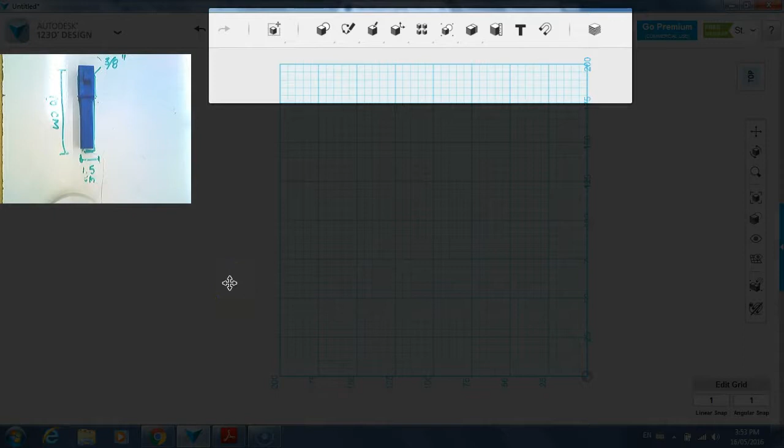Getting familiar with 123D Design, it's probably best to start across the top. These are our transform tools. They allow you to move objects around, stick them together, make them larger or smaller. There's two kinds of scale options—we're not going to go into all the details. You can measure things here.

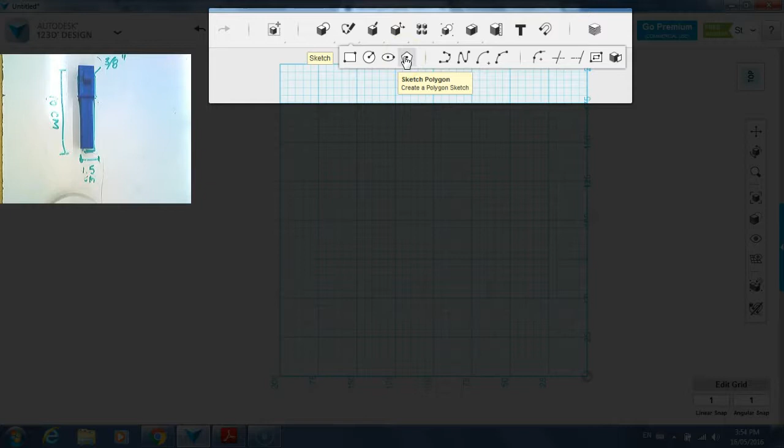Next set of tools are your primitives, these are your 3D shapes, so you're probably somewhat already familiar. These are your sketch tools, some of the tools we're going to be using today. So we can sketch rectangles, circles, ovals or ellipses, different kinds of polygons, pentagons, and then curved shapes as well, which we'll talk about.

Here we have constructing tools. Extrude is one we're going to look at today, as well as press pull. Extrude is contained in the construction menu, and press pull is contained in the modify menu—that one's going to be key for finishing our cube later. Other tools here are for patterns, grouping, combining and subtracting objects to and from each other, which is kind of neat, and our measurement tool.

Okay, so we're going to start with our sketch tool, and we're going to start to make our ratchet simply by grabbing a rectangle.

Notice over here, I'm in the top view, and the other thing we're going to do with view is make sure when you're starting out that you're actually in the orthographic top view. That just means I'm going to look at this object head on, as though doing a topographical drawing. If you change your view to side, left, or right, you'll be looking at those objects head on from that view, but we want to make sure we are in orthographic when doing our initial design here.

I'm going to zoom in a bit—it doesn't really matter, it's all relative. The idea that I'm zooming in is relative to the size of my shape.

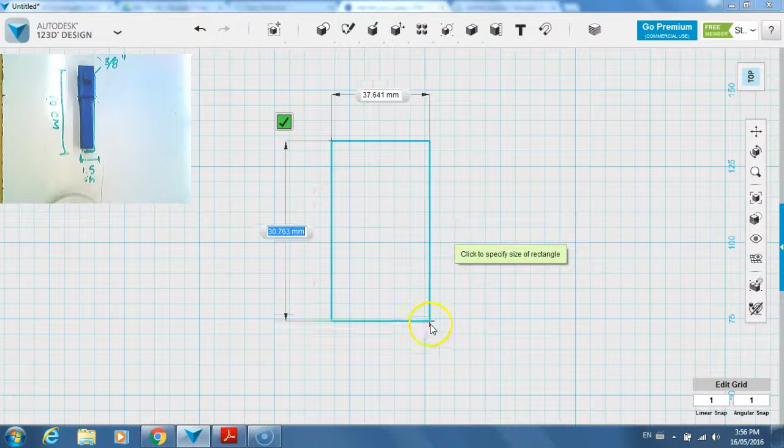But I'm going to click rectangle, and go down to the space where I want to start sketching. I'm going to click on the plane and just start dragging my mouse. I've not clicked yet, so I can still make this rectangle. This light blue line represents the rectangle I'm about to make, and you'll notice right now I'm in millimeters as my measurement.

I'm going to want that later, but for now I'm going to switch over—I'll just escape out of that. So I'm going to edit my grid, and you'll notice the default measurement units are in millimeters right now. I'm going to switch that to centimeters just to make this a little easier. So I'm just going to quickly do a little measurement here of my shape.

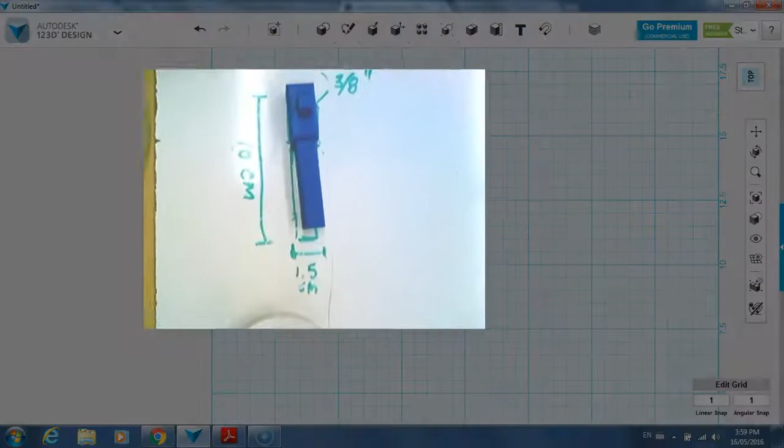So I've got most of my measurements. I know on the short end I'm 1.5 centimeters and my length is 10 centimeters. I want to see the larger shape here though, and it's coming in at about 2 centimeters. I'm just going to put it down over here, right around 2 centimeters, and just to make it simple, I'm going to shorten that and make it 2 centimeters, just to make the numbers nice and round.

I'm going to switch back here. I'm going to go into my rectangle tool, my sketching tool here, and I'm going to sketch a rectangle that is 2 centimeters wide.

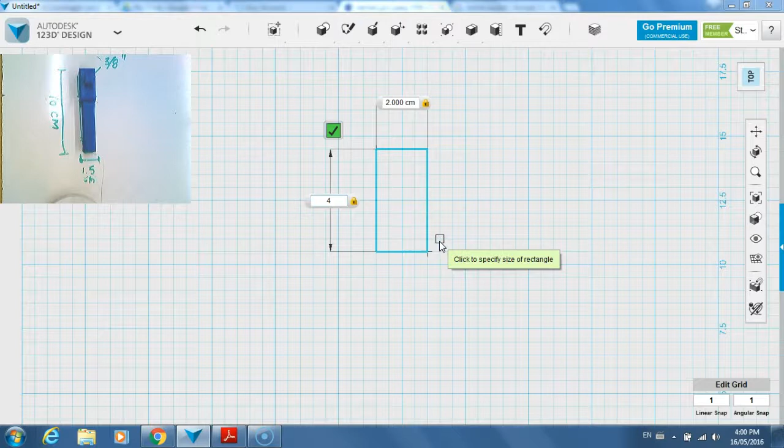Sorry, it's not 2 centimeters wide. I'm going to tab up to get to the other one. 2 centimeters wide. And my length of my first rectangle is going to be 4 centimeters. So I'm going to tab to get to the next button, and I'm going to hit 4. So now I have a 2 centimeter by 4 centimeter rectangle. And to make that shape live into the space, I'm going to hit the enter button once. Actually, I'm going to hit it twice.

Now I want to draw a second rectangle that's going to represent this part of the shape. I'm going to go over here and grab my second rectangle. And believe me, there's many ways you can do this, this is just one way. So rather than getting too hung up on this specific measurement, I'm just going to use a visual, non-traditional measurement here. I'm going to actually use the grid lines because I have a nicely aligned shape here. I'm going to use these 2 grid lines, here and here, to make my handle for my tool.

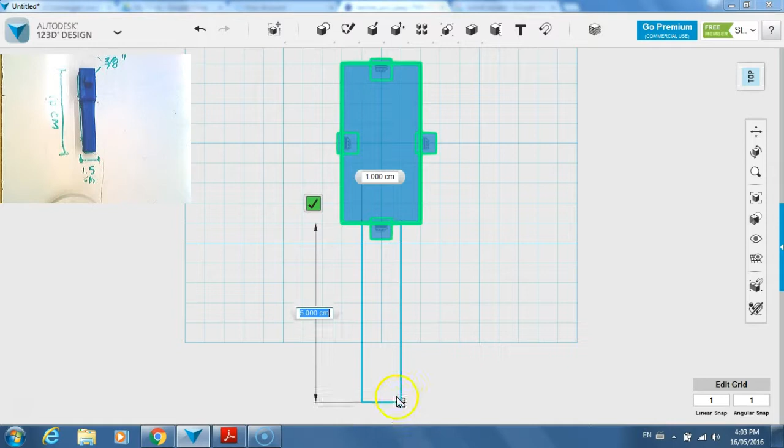So I'm going to go over to the sketch tool and select the shape that I want to add the handle to. I'm going to click once. Now it looks selected, you can see it's not as dark blue anymore. I'm going to click once and start dragging. I'm going to use these 2 lines to align my rectangle.

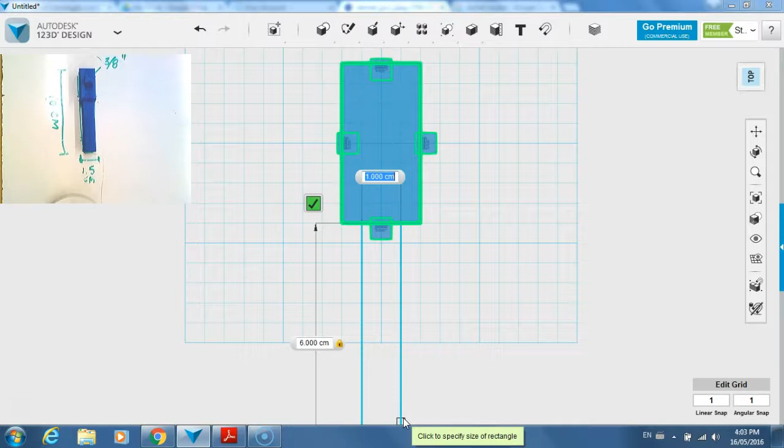Now the height, we're going to want this to be about 6 centimeters because our total height is 10 centimeters, and I know the top part of the tool is 4 centimeters. So we're going to make that 6 centimeters to make up for the extra space. And the other one, I'm going to leave at about 1 centimeter right now. So we're doing a slightly different design, but that's okay, it'll work just fine. I'm going to hit enter twice, and now I have a shape that mimics or looks similar to the base shape that I have over here.

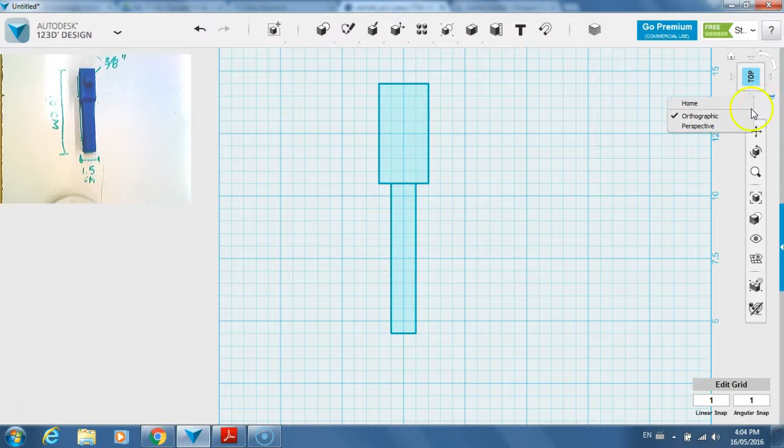So earlier I told you about using the orthographic view for when you want to look at things head on. Now I'm going to switch. I'm going to go over into this little sub menu and I'm going to click on perspective, and you're going to learn about a new viewing tool here.

This is the orbit tool. I'm going to click once on the orbit tool and this gives me a circle. I'm going to put my mouse inside the circle and just click and drag my mouse, and I can change my view now. And you'll notice that what I have is actually a 2D shape, not a 3D shape.

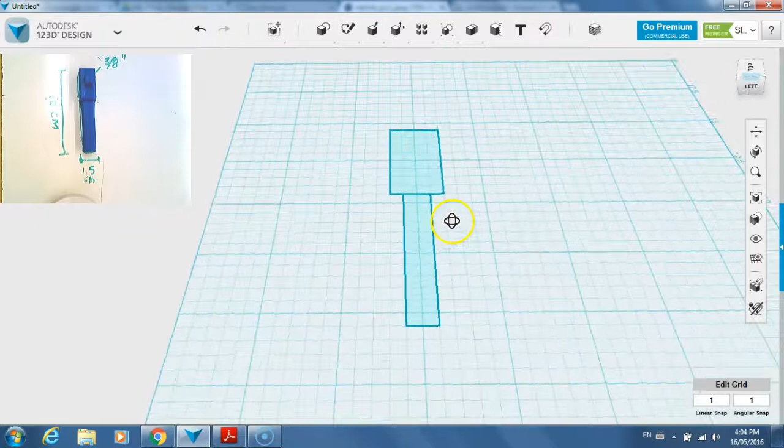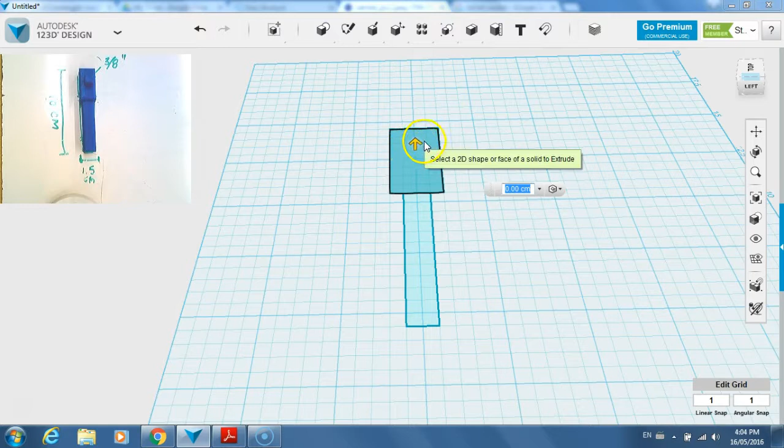So I'm going to grab one of these other tools I told you about earlier. You can actually do this with either of the 2 tools. I'm going to use the extrude tool right now to show you how we're going to drag up part of our shape. So I'm going to grab the extrude tool and click on the first box that we made. You'll notice I have a little arrow here that is white.

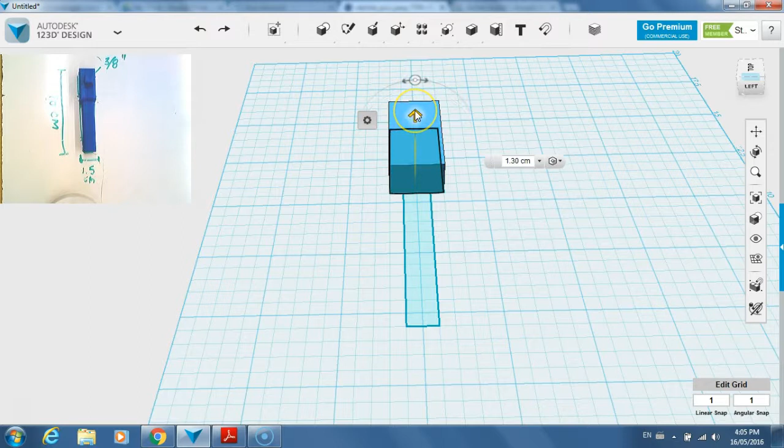And as I put my mouse over the arrow, it turns yellow. I'm just going to physically click hold. Oops, try that again. Physically click hold and drag that shape up. Now, if I use my tape measure, we're looking at about 1.3 centimeters tall.

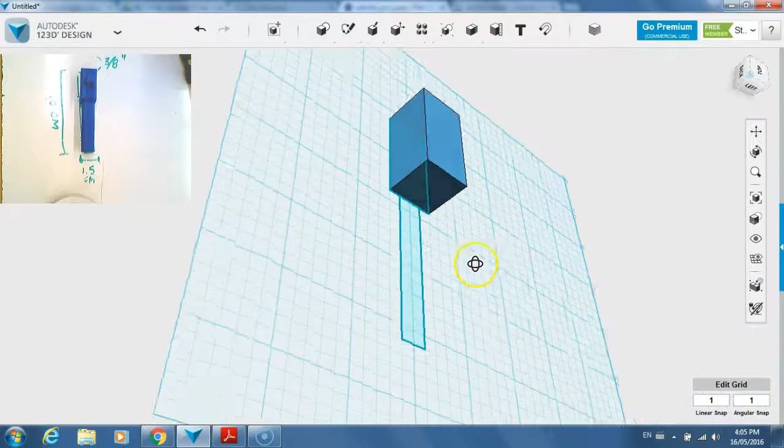So right now I'm around 1.3. I'm going to double click in here to select the shape. I'm going to click on 2 and hit enter. So I go back to my orbit tool and it shows me I now have a 2 centimeter shape.

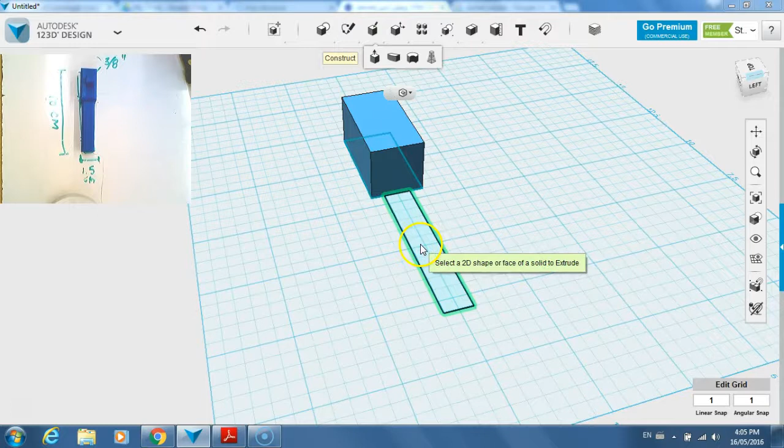Well, that's great, except my handle, the other part, my handle now is still flat. So I'm going to repeat the same process, but I'm not going to make it quite as tall because I want a little bit of a ridge there. I'm going to grab the extrude tool again, go down to my other shape, click once and drag up. I'm just going to eyeball this one, and to keep it reasonable, I'm going to make it 1.25 centimeters tall. So we've started to build a 3D shape.

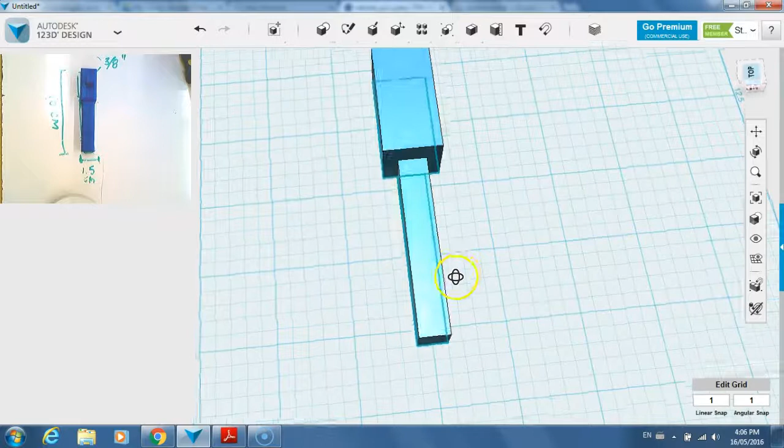It's the base of our tool now. So this is where our hand is going to go, and this is where our ratchet's going to go up here. This is the pan tool. The pan tool allows you to move your camera view around. Notice that when you are panning around, you are not affecting or changing the object in any way. Same with the orbit tool, I'm just changing my view rather than the actual object.

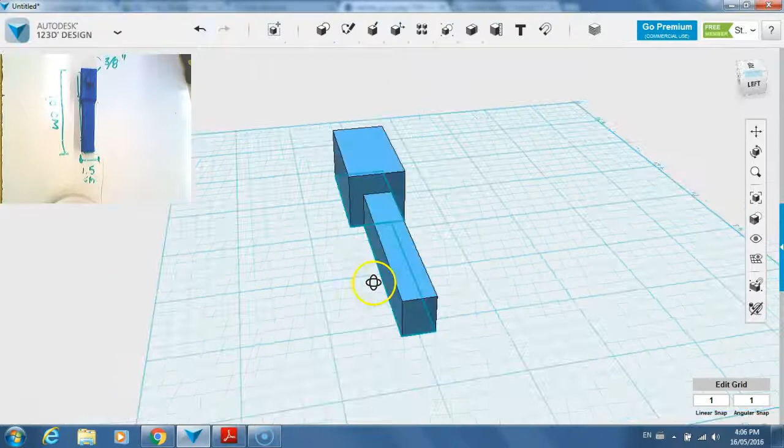Okay, so now we've got to modify this in such a way that we can actually connect this to a socket. So right now we have the base for our ratchet, but now we want to turn it into a ratchet that could actually accept the socket that we're going to use.

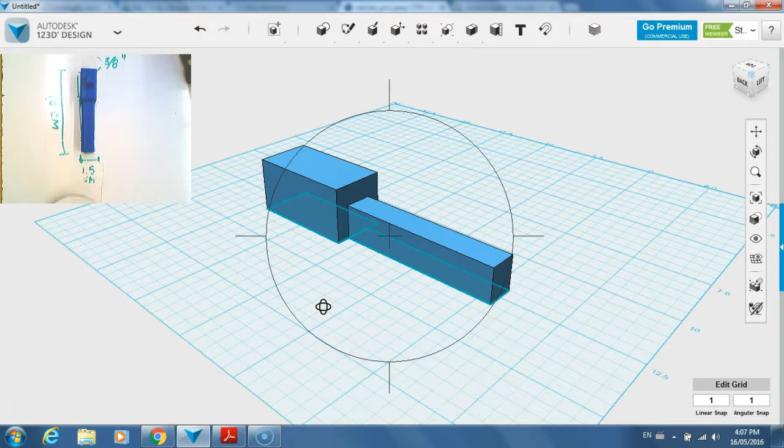The one I'm going to use for demo purposes is a 3/8 of an inch ratchet or socket. So we're going to need a 3/8 inch male component to our socket. And we want to convert 3/8 of an inch to millimeters, which is 9.525 millimeters.

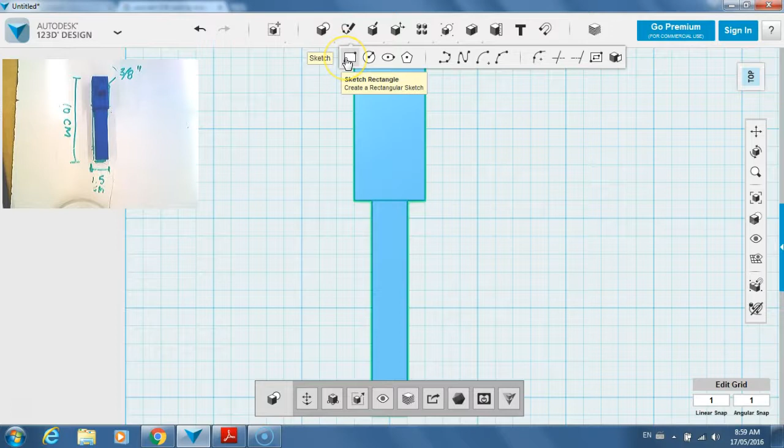Okay, I'm going to now switch back over to 123D Design. Move my camera up here, go back into the sketch tool, grab the rectangle, click on the shape I want to draw my rectangle, and start dragging down. You can see there's a square there. I'm going to go and type in my dimensions now.

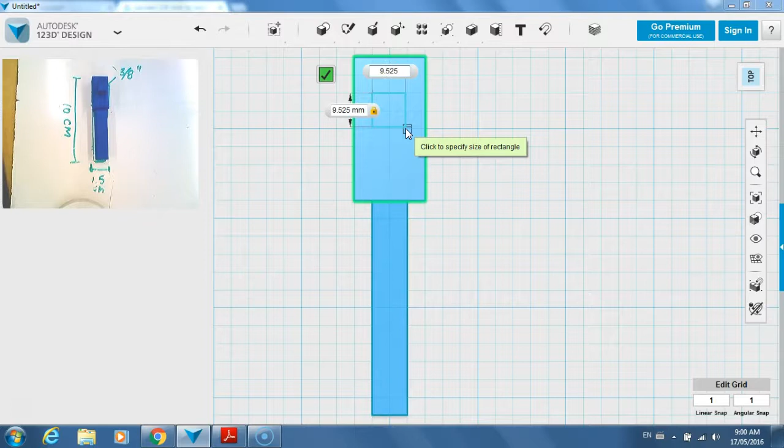9.525, tab to get to the next box, 9.525, and hit enter. And I now have the right-sized square to finish my ratchet.

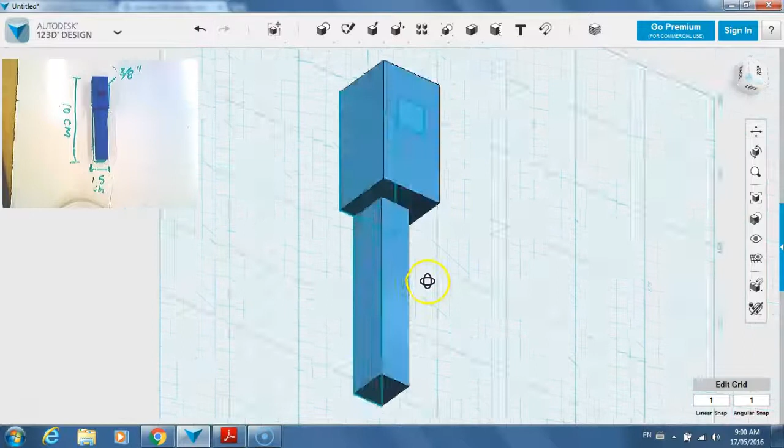All I have to do now is make it 3D. I'm going to go to my orbit tool. Now you'll notice right here the difference between orthographic and perspective. When I'm in orthographic, the view is intended to be head-on, so the shape looks a little funny. So I'm going to switch back now to my perspective view, and it corrects the shape to look the way it should look when you're looking at it from an angle.

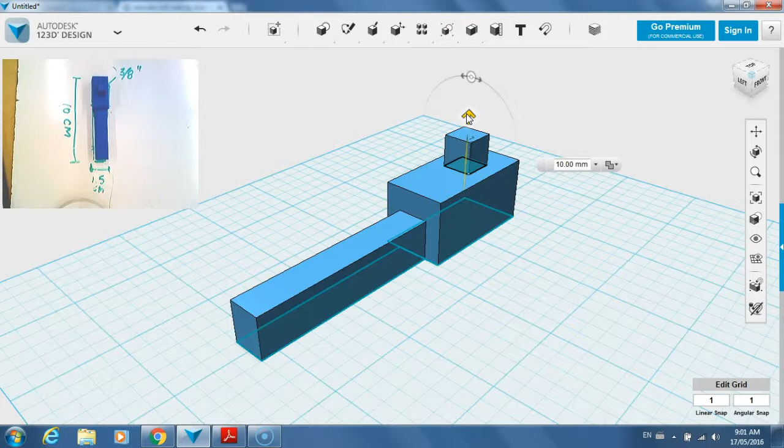I'm going to grab the extrude tool like we did before. Actually, this time I'm going to grab the press pull tool from the modify menu. And when I see the yellow arrow, I'm going to click, hold, and drag it up. There's no exact measurement for this one. That's about 1 centimeter, and that should work. And I'm going to hit enter.

Okay, now we have our basic shape. This alone would work. We could put the socket on the square end here, and we should be able to turn it, just for a little bit of style. We're not going to do too much because we don't want to be sitting here all day. I'm going to just add a little bit of curve to the shape.

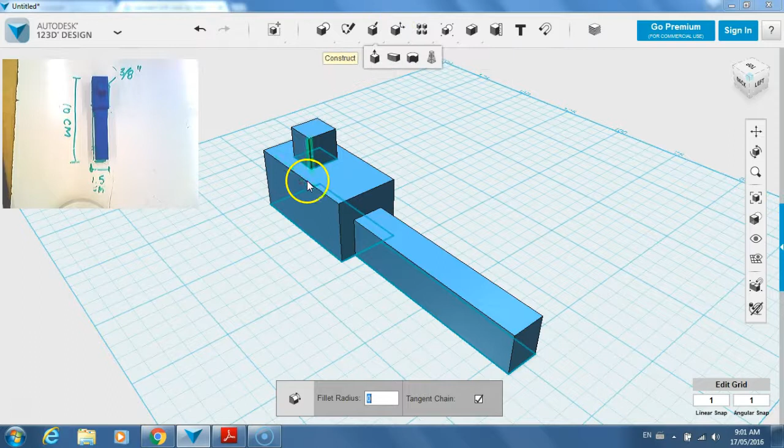So I'm going to go into my modify menu again, and I go over to the fillet tool. This is a term you might actually hear in woodworking, same with chamfer, depending how you pronounce it. I'm going to grab my fillet tool and select all the top edges of the base shape, clicking on each edge while holding the shift button so I can select multiples at the same time. That's a very common theme in a lot of software, is holding shift to select more than one shape or edge.

And you'll see I have my yellow arrow. I'm going to drag that ever so slightly down just for a little bit of visual appeal. And when I like the look of it, I'm going to hit enter.

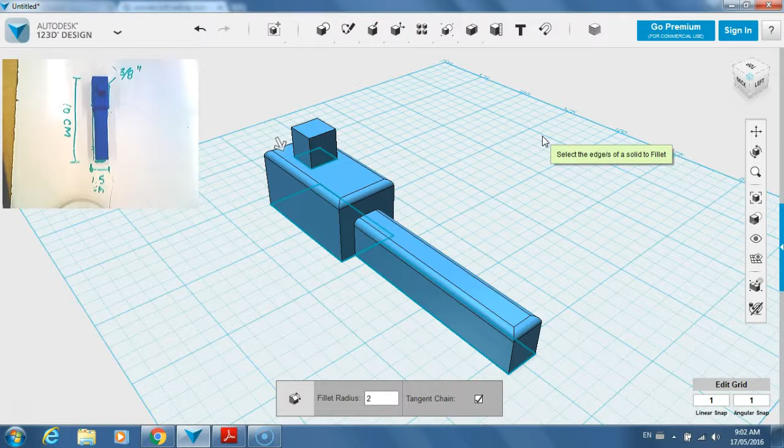I can do the same up here. Go to fillet, click, hold shift, click, click, click. And I'm just going to pare that down a little bit. Awesome. If I like the look of it, I'm going to hit enter.

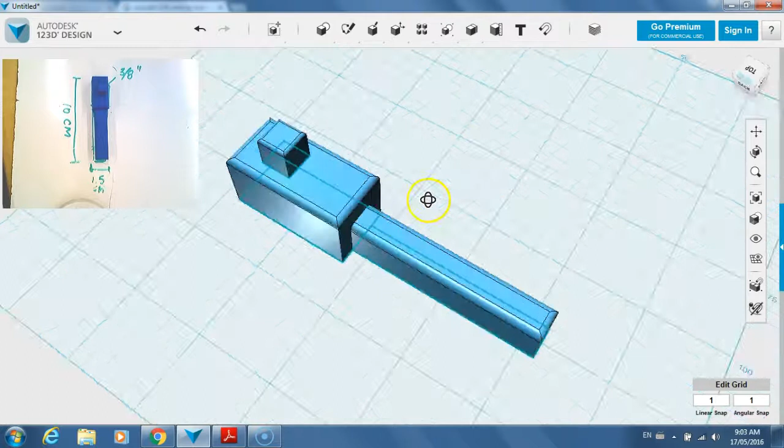And there we go. That, when 3D printed, will be a working ratchet. Very similar, maybe not quite as stylish, but very similar to the ratchet that the International Space Station 3D printed while in orbit. And there you have it. Let's see if you can make it now.